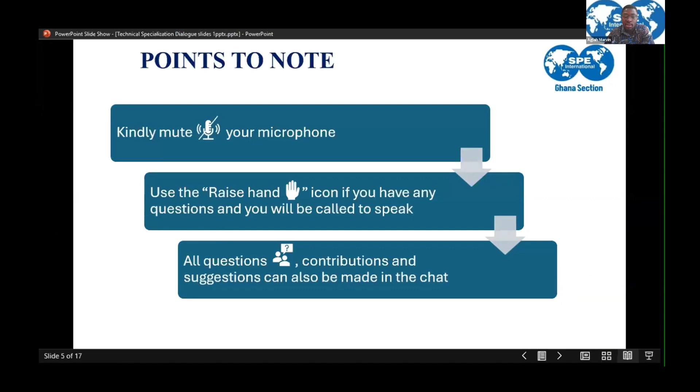So before we begin the meeting, I'd like to outline what exactly we are in for. Just a brief outline of our program this afternoon. We are going to have a welcome introduction, which I've briefly done, and we'd have an opening address, and I'll be introducing the person to do that in due time. We'll have the first presentation, the second presentation, then we'll move over to a cross-questioning session, and then a Q&A session. I'll be leaving a feedback survey in the chat box for us to fill right after the program so we can assess the program and make it better next time. We'll have a vote of thanks as well by the end of the program.

So we'd like to proceed to the business for the day and a very important segment for this afternoon session. But before we do that, we would have a welcome opening address by one of our distinguished own, in the person of Akosua Bandoh, who happens to be the Deputy Career Guidance and Outreach Chair for SPE Ghana.

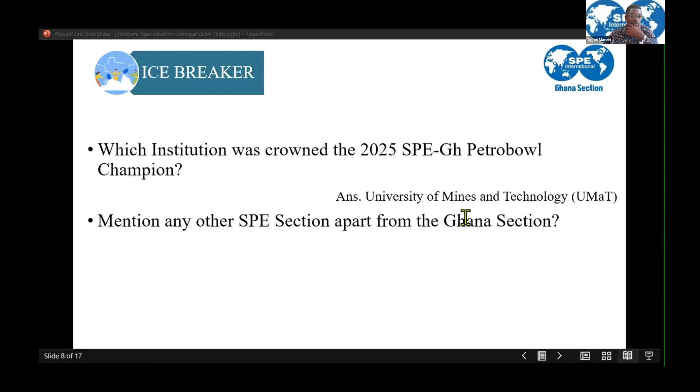Any other SPE section apart from the Ghana section? Okay, I'm having one answer. That is the Lagos section. Thank you very much for that answer. And so we have Lagos, Port Harcourt, and Burkina happening to be among the other sections in SPE.

So our final question, who is the current special programs chair of SPE Ghana? Can you kindly name the personality who happens to be the current special programs chair of SPE Ghana? We had a late answer from the previous question, Angola section. Thank you very much for that answer. To our next question, who is the current special programs chair of SPE Ghana? This is quite a tricky one. If you have been following SPE events, you should get this one.

Who is the current programs chair for SPE Ghana? The time is going. If we have no answer, okay, we have an answer. We have Fifi Nyanko Uto happening to be the special programs chair. Thank you very much for that answer.

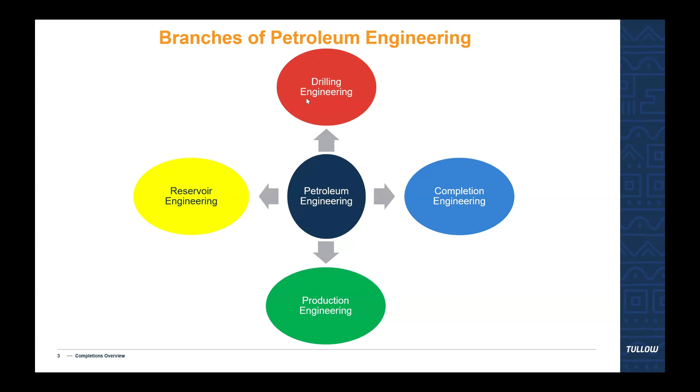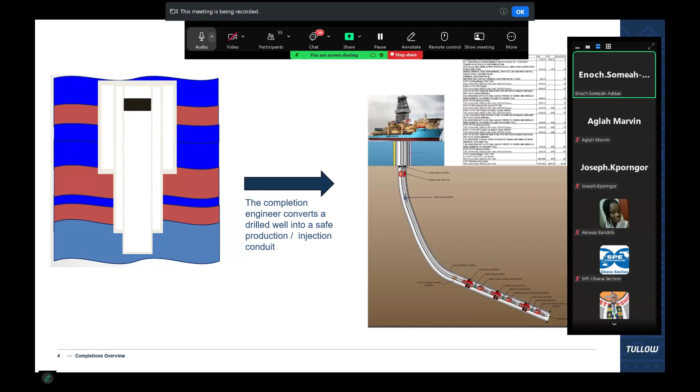Okay, so moving on to the next slide. Over here, I have a very simplified diagram of how the well looks when it is handed over to the completion team. So on your left, we basically have a hole drilled into the earth, and you can see some strings of pipes, which we call the casing, run in place, and these casings have been cemented. I don't know if you can see my cursor, but over here, we have what we call a suspension plug, which is used to suspend the well before we come in to start our operations.

So basically, when we come in, we recover the suspension plug, and we install smaller steel pipes, which are called tubings, and we also install specialized equipment and tools in the wellbore. So on the right, that picture really shows how the setup looks during the operational phase, when there is a rig in place, and we are installing, or we have finished installing, the completion.

When we hand over the well to the production team, the rig will no longer be there, and the section of pipe in the water will also not be there. And in place of that, we would have the Christmas tree on top of the wellhead, like Joseph explained. And basically, that is the role of a completion engineer. He converts a drilled well into a safe production or injection conduit.

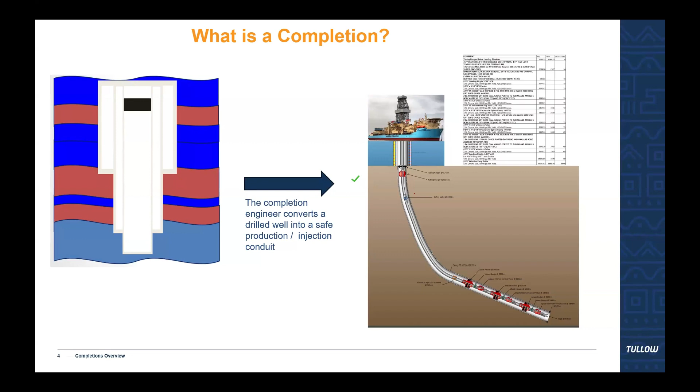Yep, so we've touched on some of this. Completion follows the drilling phase, and it involves the design, selection, and installation of tubings, tools, and specialized equipment into the wellbore. And these provide a flow path to enable us to produce hydrocarbons from the reservoir to the Christmas tree, or to inject gas or water into the reservoir to support production.

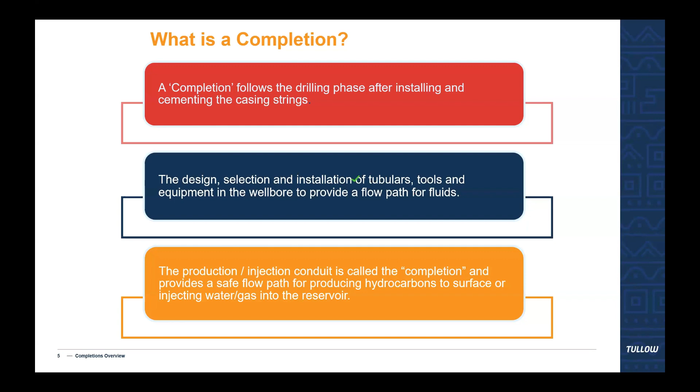Now, depending on the strength of the rock, it will determine whether the completion engineer has to design a well which has sand control in place, or the rock is very strong, such that we can do with a simple open hole completion.

The completion engineer also needs to know what the reservoir pressure is. Fundamentally, all the design work that he does is going to be influenced by the pressures that exist downhole. So he needs to understand that pressure, and it basically forms the basis of all the design work that is done afterwards. So things like calculating brine weight and deciding on which sort of brine to use in the well is all dependent on the pressure.

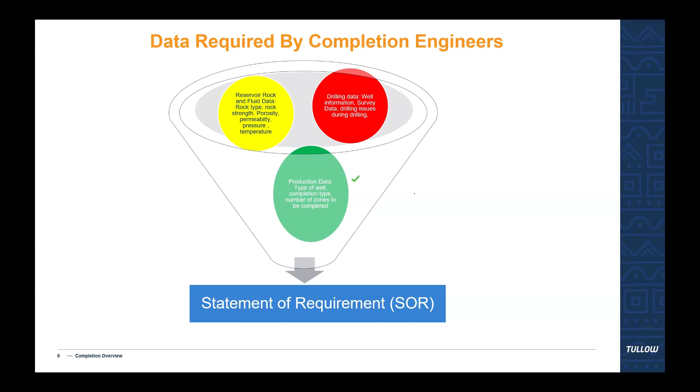So he'll interface with drilling, geologists, reservoir engineers. He will interface heavily with the service sector. So the service sector are companies that we work with, and these companies provide us with the tools, the equipment, the chemicals, the fluids that we need for our job. So we interface heavily with them to procure these consumables or tangibles that we need. The completion engineer interfaces with specialists such as the metallurgist, and like I've explained, the fluid that

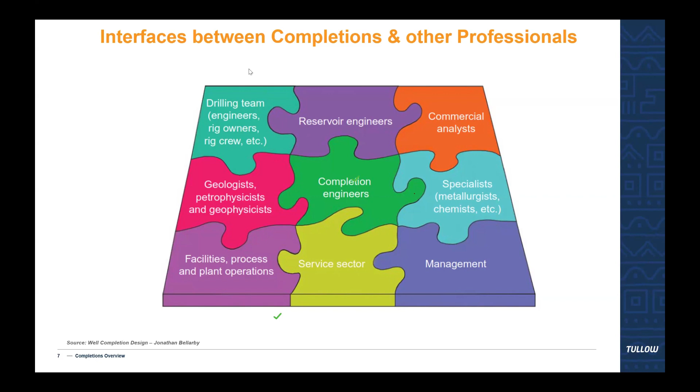It's to determine the size of the tubing that you want to run. Okay. So if it's an oil producer, you need to size the tubing accordingly. If it's a water injector, then the rule of thumb is that the bigger, the better. So for a water injector, you want to use the largest tubing possible to allow you to push a lot of fluid from surface into the reservoir. And to be able to do this, the engineer has at his disposal special software that he employs in his job. So to carry out inflow and outflow modeling, he would have software like Prosper to do that.

The engineer also does tubing stress analysis. So basically, once you put a well on production or injection, the movement of fluid from the reservoir to the Christmas tree, because these fluids are under pressure and at high temperatures, puts a lot of load or forces on the tubing. So the design engineer at this point has to run simulations to select tubing of appropriate grade and metallurgy to withstand all these load cases. And also he's determined the size of the tubing.

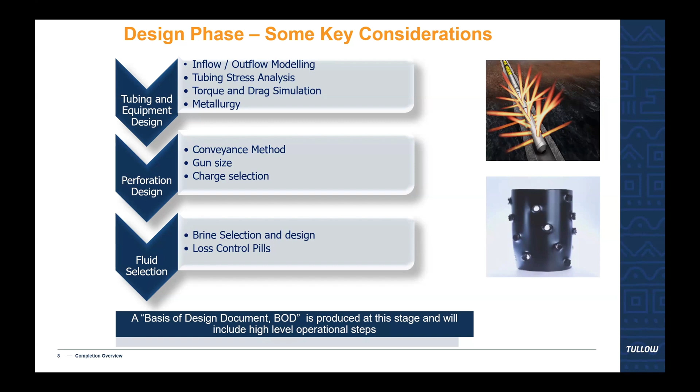So the next stage of the well delivery process is called the planning phase. So at this phase, I'll touch on some of the roles that the engineer will perform. Like I said, depending on the size of the company, you could have one engineer who does all of this, or you could have dedicated engineers assigned to each of these tasks.

So I'll start with what we call time and cost estimate. So over here, what the engineer is doing is that he calculates how long the whole operation is going to take. So he picks the BOD, he looks at operations that would need to be performed offshore to achieve those objectives, and he puts a time or a duration to each activity, and in the end he comes up with a number. And to do this, the engineer uses offset data, or information from past wells that have been completed. He also uses his judgment and experience a lot.

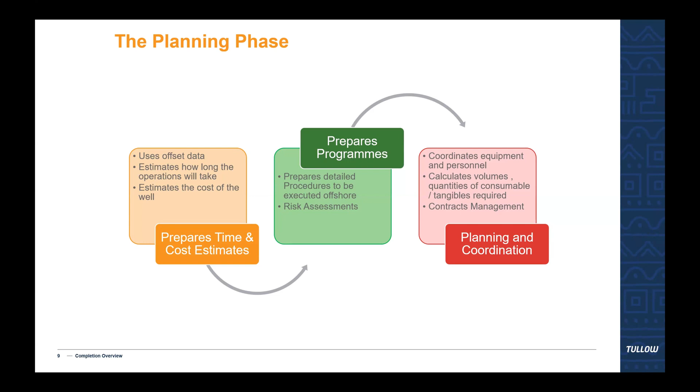Then we transition to operations. So operations, this is where we carry out the installation. This is where we actually do the job, right? And over here, the completion engineer works as a supervisor. So he supervises people and ensures that they are following the procedures that have been outlined in the completion program and that they do not deviate from the program, right? He also supervises any testing that is required to be done offshore to ensure that procedures are being followed.

So I'll quickly go through some of the key operational phases. I know when I started, I gave a very basic explanation of how completion is carried out. And I know it may have come across as being very, very simple. Somebody would say, oh, this is easy to do. Well, it's not that easy.

So basically, when we come onto the well, the first phase is the Christmas tree installation. So over here, we interface with the subsea engineers, that is Joseph and his team. They would come in and put the Christmas tree on the wellhead. Once that has been done, we enter the well, and at this stage we recover any suspension barriers or plugs that were left behind from drilling. So basically, you take out all the barriers and you now have access to the wellbore.

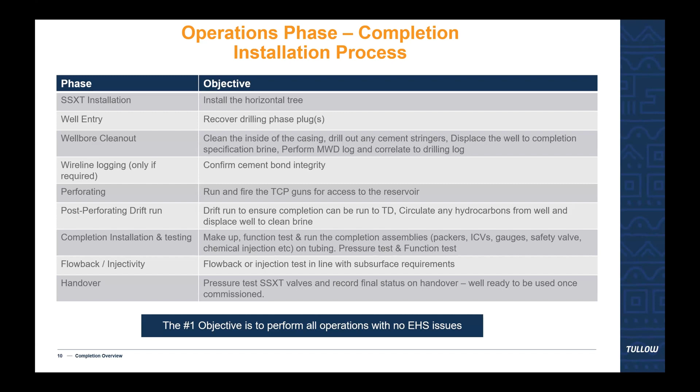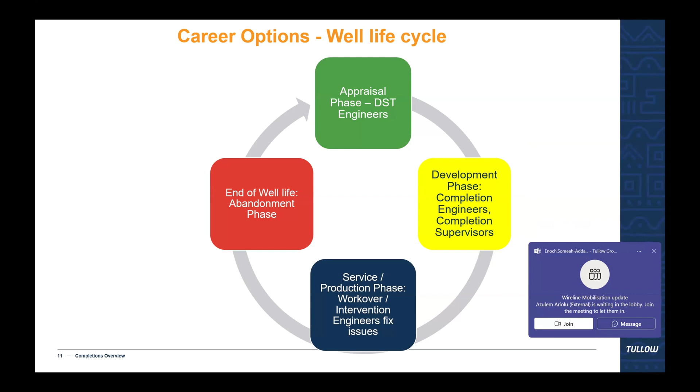Now, the DST is a temporal phase where you are doing your exploration, and at this stage, maybe it's a new field. So once you haven't started with development, you want to confirm the performance of the field. And to do that, you first of all drill exploration wells, and you do initial well testing to determine the capacity or the performance of the reservoir. Now, because it's at the exploration, the type of completion is temporal. After the exploration, you can retrieve the completion, or what we call a DST string. We retrieve it from the well.

So the design considerations that go there are different from when you are designing for the life of the well. So if I'm designing a completion which is going to last me a month, there is no point putting very expensive equipment in there, right? So that's the DST engineers. Then we come to the development phase, which I have discussed in the previous slide.

Then once we hand over the completion to the production engineers and they are managing the well, from time to time, they encounter problems. You remember, we run so many tools into the well. So at some point, some of these tools can malfunction. Say gauges can stop working, and you are not getting any readings from your gauges. It could be your sliding sleeves, or it could be your interval control valves. They are supposed to open to increase rate or reduce rate. These ICVs, or interval control valves, can get plugged with debris. And when this happens, you need to go back into the well and fix the problem.

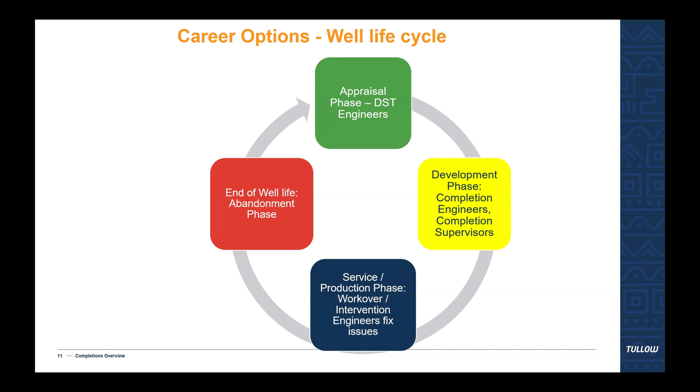And finally, when the well reaches its end of life, we want to abandon it. By abandonment, we are installing plugs into the wellbore to make sure that the reservoir is isolated and that we have a minimum of 2 barriers in place to prevent hydrocarbons from flowing uncontrollably to surface, and that is abandonment. So in all of these phases, the completion engineer is involved. He may take on different titles, he may take on different roles, but it's still the completion engineer at work.

Then finally, I want to talk about career options. So as a completions engineer, you can work in the office, designing and planning wells, or you can be offshore or in the field, supervising projects. You could work with an oil and gas operator like Tullow, like ENI, like Chevron, like Shell, or you could work with a service company. You could also work with government institutions like the Petroleum Commission or GNPC, or you could go into academia and be a lecturer and help train young professionals who want to enter the industry.

Or better still, you could set up your own private consultancy where oil companies will now come to you to provide solutions for them. And some of the key skills that you need as a completions engineer is project management, of course, because of the number of people that you encounter, right? You need to develop your project management skills. You also need to learn how to supervise operations.

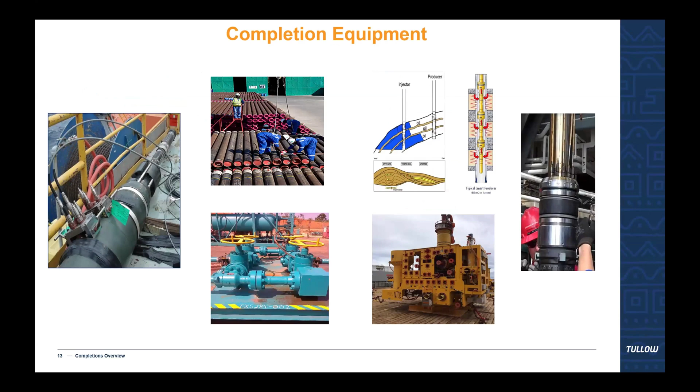Marvin, over to you. Thank you very much, Mr. Enoch, for the wonderful presentation. Quite an elaborative one as well. You highlighted a lot of key information and a lot of technical information for us as well. We found out how some of the roles depend a lot on each other, especially reservoir data and the integrity of the well. And then we also saw that we need to ensure that we have environmental health safety concerns as part of each of our projects as well. So thank you very much.

I'm sure as we move on to the next session, we'll be able to highlight some of the key areas you mentioned in the latter end of your slides as well. So we would like to move on to the next session. We are going to have a cross-questioning session where we ask some key questions to our distinguished speakers. And so I'll be doing the questioning. And so at this point, each of the speakers, Mr. Enoch or Mr. Joseph, you are at liberty to pick up the questions and answer them as they come about. Thank you very much.

So to our first question. The cross-questioning is going to highlight 4 key areas. We are going to look at distinctiveness of each of the roles. We are also going to explore how some of the roles collaborate with each other, some of the challenges we experience, and then also finally some future career opportunities as well for young professionals and students alike.

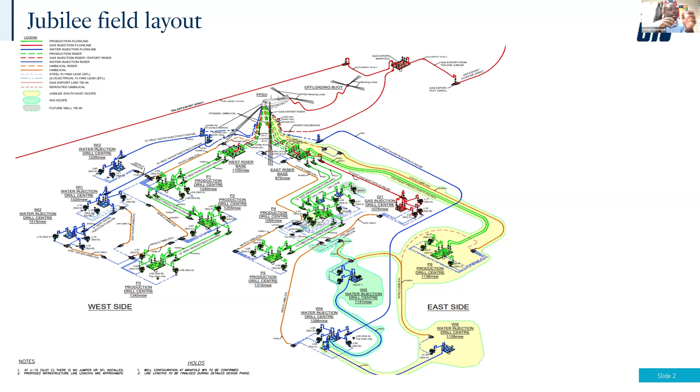And then you see the red line at the very top. That is your gas export line going to GNGC. Now, what you are seeing here, I'm trying to give you an appreciation of the size of a field of this nature. These are several kilometers apart, and I'm not talking about 1 kilometer, 2 kilometers. These lines are pretty long. So that gives you an idea of the magnitude and the size of kits that we play with.

The reason something of this nature is important to the young ones is to let you understand that when you actually come into this space, so long as you are open to learning, you are open to development, you have a curious mind, you will be given the tools that you need to actually excel.

When Enoch's profile was being shared, there was one line in there about this completions training. Enoch, forgive me for not remembering the exact name of the training that these drillers and the completion guys go for. Basically, every good company that you join will give you the training that you need to excel in your role, the training that you need to develop, and the training that you need to be able to actually deliver on the various projects that they have.

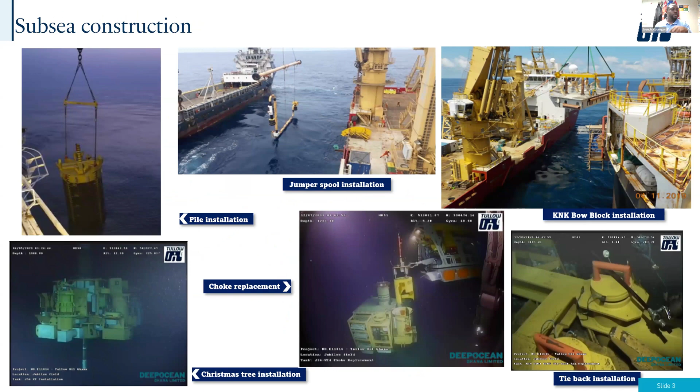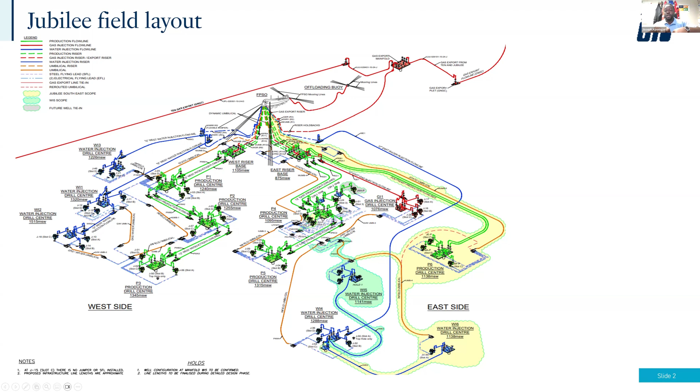You see here different pictures of different projects. There are so many different things in this picture. On the extreme left is a suction pile. Let me go back so that this will make sense to you. I don't know if you can see my cursor, but in the layout, the green line, you look at the structure there, that is a manifold, and the various wells are connected to that manifold. So flow from each well commingles in the manifold and then together flows in a line going to the FPSO.

Now, in the next picture, you see that cylindrical structure being deployed into the water column. That is a suction pile as an example. Depending on the type of seabed that you have, your manifold may be stationary and stable on the seabed, but if you're dealing with very soft seabed, then you need a foundation for it. The suction pile sits on the seabed, your manifold sits on top of that, and it keeps it stable for you.

The second picture, you see a jumper there. I talked about the wells being connected to the manifold. That is a piece of pipe that connects your well to the manifold. The beauty of this is, if you jot these words down and Google them or go on YouTube, you'll see so many different videos and animations that would explain them to you. So you don't have to try to memorize anything that I'm saying here.

The picture on the bottom left is an example of a Christmas tree being deployed for installation. The one in the middle is a choke that is being replaced. The one there was faulty; remove the faulty one, put a new one in. So different things going on in this space. Here are some of the supports that happen onshore: the fabrication of the jumper itself prior to it being sent offshore.

You have these flying leads, interesting names for them. The umbilical is the means by which you have your hydraulics, chemicals, fiber optics, and electrical signals being sent from the topside to your subsea infrastructure. These ones you are seeing are only for hydraulics and chemicals. So steel tube flying leads, SFLs, will handle your hydraulics and chemicals, and electrical flying leads, EFLs, will handle your electrical connections.

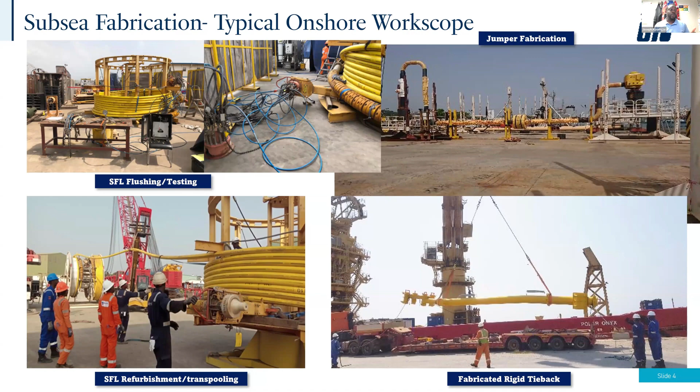If you do have fiber optics in the field, then you also have one, or you can even integrate your EFL with your fiber optics, depending on what you have in the field and what you're trying to do. So once again, the limitation is actually your imagination. There are so many different things that you can come up with in developing your field or solving a problem.

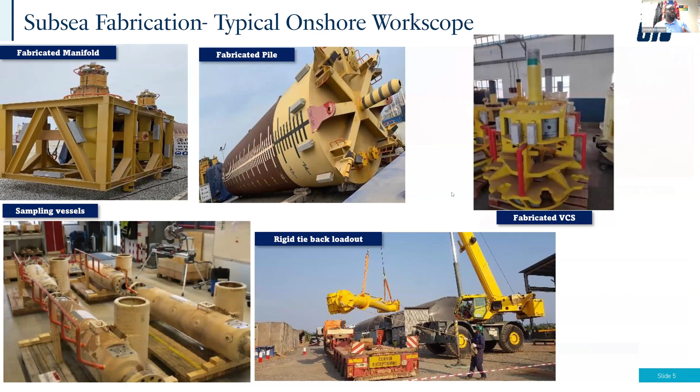If you look at this picture, for instance, a suction pile and a manifold being fabricated, some of the kits that come together to make these structures that go subsea. So I'm trying to give the young ones who are on the call a glimpse of some of the things that you see when you are actually in this space.

This particular one is for production support. So the guys who sit behind the computers, monitoring the parameters from both the subsea equipment and then the topside equipment. And so long as any of these parameters begin to drift off, we have to troubleshoot, find out what is causing the issue and then immediately resolve it. So there are so many different things.

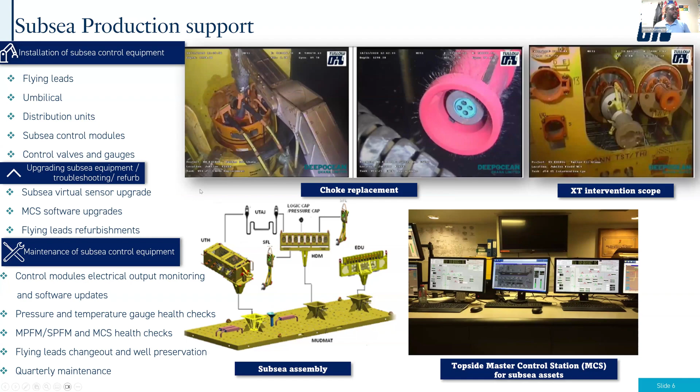And then you go on to maintenance and integrity and the various testings that are done, ensuring that your structures are adequately protected, cathodic protection from corrosion, because I mentioned earlier on that you are dealing with a very corrosive environment, seawater. So you need to ensure your structures are protected. If your anodes are either depleted or you don't have electrical connection, your structures begin to corrode.

So Marvin, to answer your question once again, for the young ones, what do you need to actually excel in this space? Well, you need to pay attention in school. That's number one. Paying attention in school is not about getting a first class. And I'm not saying first class is bad because I got first class myself. It's good, but that is not what we're talking about. What we are talking about is actually learning something vital from school. Your basics, your basic engineering, you need to be on top of that because they will all come to play when you're actually in this space.